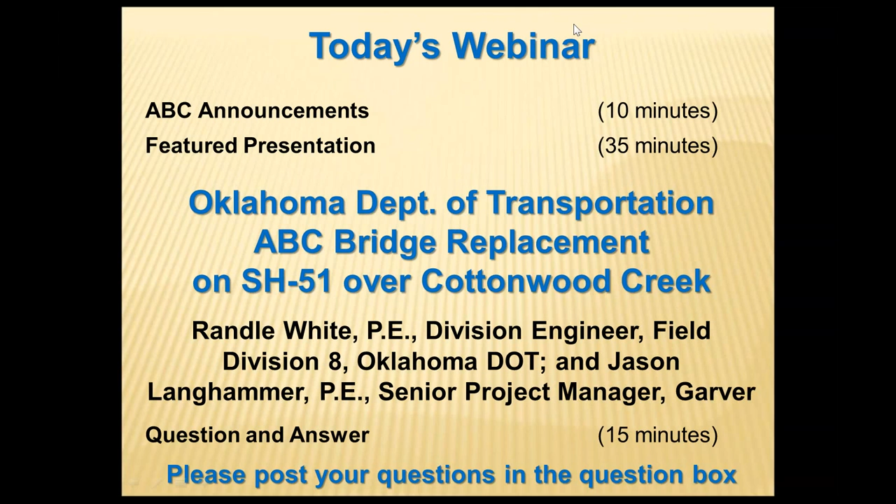Today's webinar features the Oklahoma DOT's lateral slide replacement of the State Highway 51 bridge over Cottonwood Creek. The presenters are Randle White, Division Engineer in Field Division 8 of the Oklahoma DOT, and Jason Langhammer, Senior Project Manager with Garver.

Good afternoon, I suppose, or good morning, depending on where you are. Jason and I are certainly happy to be here at the location to make the presentation. I'm going to have to ask somebody to get the slides. There we go, lost the slides for a minute, sorry about that. If you'll notice in the top right-hand corner of the slides, there should be a page number. If you have a question for Jason and I, if you'll refer to that, that'll help us get back and answer that question. Next.

This was the first accelerated bridge project in the state of Oklahoma. We had gone to several other states several years ago and looked at some of the accelerated bridge construction that they had been doing, but this was the first one in Oklahoma. One reason we wanted to do the bridge slide is back in 2011, our governor, Governor Fallin, challenged the Department of Transportation because we had a serious issue with structurally deficient bridges. We were showing up at the bottom of the list for some of the worst bridges in the nation from a structurally deficient standpoint. In 2011, our NBI list showed 706 structurally deficient bridges. The governor wanted us to reduce that number to get as close to zero structural deficiencies as we could by the end of the decade. To do that, we were going to have to address 80 to 100 bridges per year. So we were looking at opportunities to deliver projects and expedite construction, but we also knew with that number of bridges, we were going to have an impact on commuters, so we were looking to minimize that impact as well.

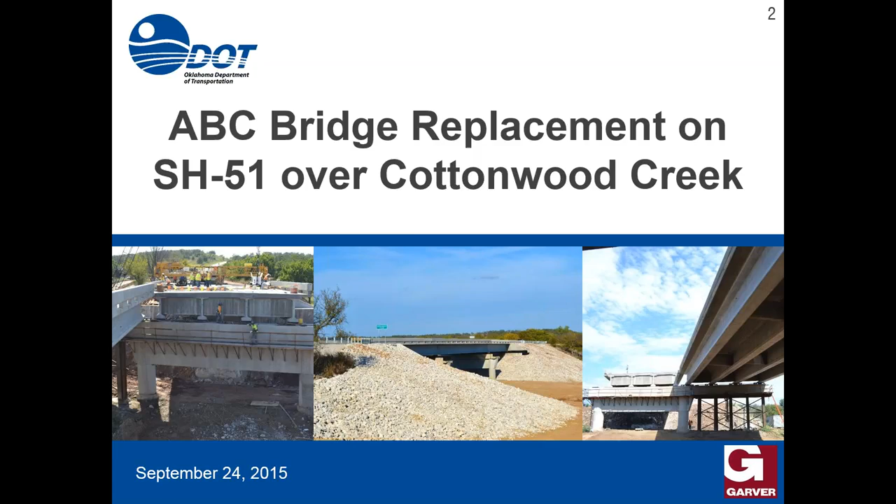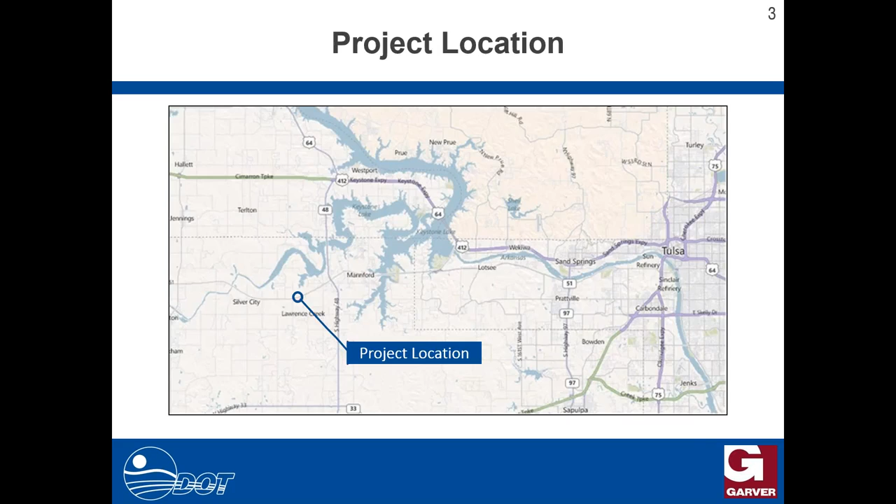The existing bridge was built in 1961 as part of the relocation of State Highway 51 when the Corps of Engineers built Lake Keystone. The bridge is 271 feet long, comprised of six 45-foot steel I-beam spans, with a clear roadway of 28 feet. The condition of the bridge is rated as structurally deficient. The deck is rated poor, the superstructure fair, and the substructure also poor.

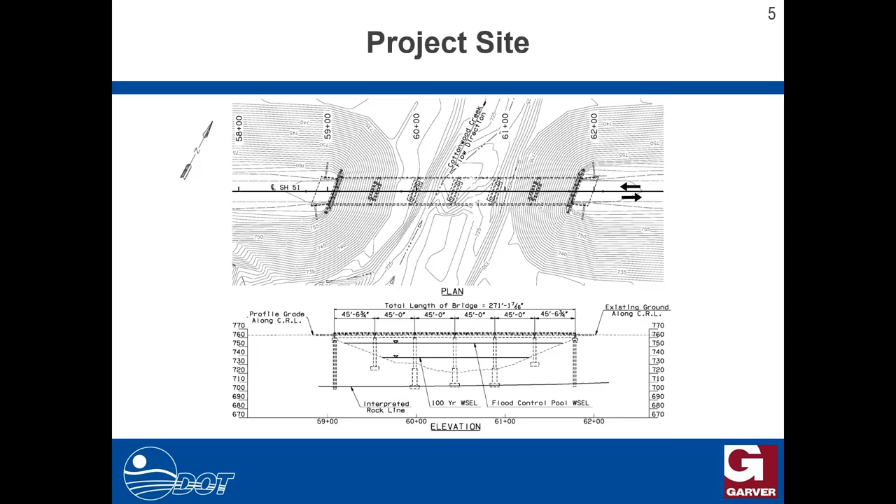Let's take a look at a couple of pre-construction photos next. This is on the roadway, looking to the west. The approach roadway width has two 12-foot lanes with two 8-foot shoulders. The bridge width is two 12-foot lanes with two 2-foot shoulders. You can see we have substandard guardrail and substandard bridge rails, as well as an asphalt overlay over the concrete approach slab. We'd had some settlement there, and that was an attempt to level out the bump at the end of the bridge.

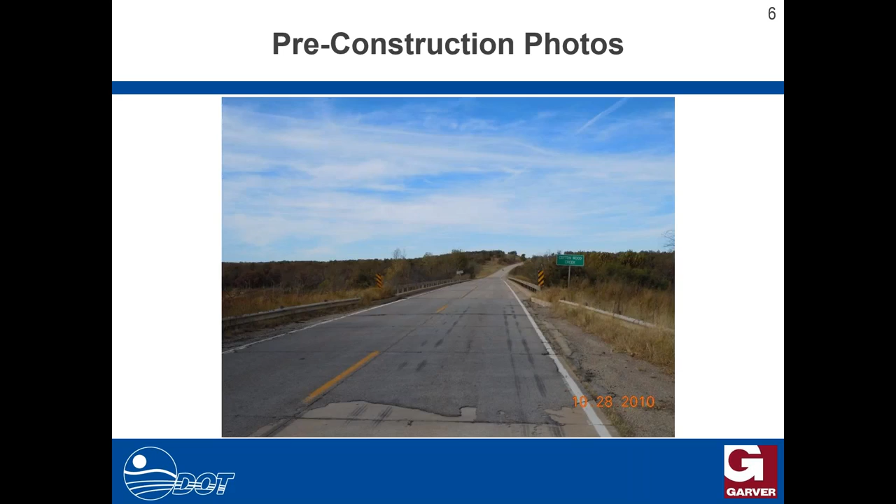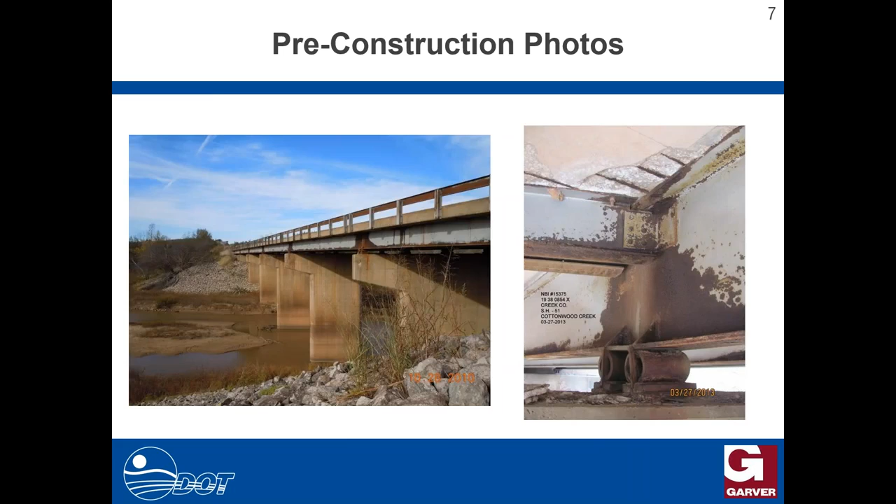Here we're taking a look at the pier caps. You can see that we're losing some of the pier caps, some of that is spalling off. The photo on the right shows some rust spots just under the roller bearings - those are some of the stirrups that are starting to rust.

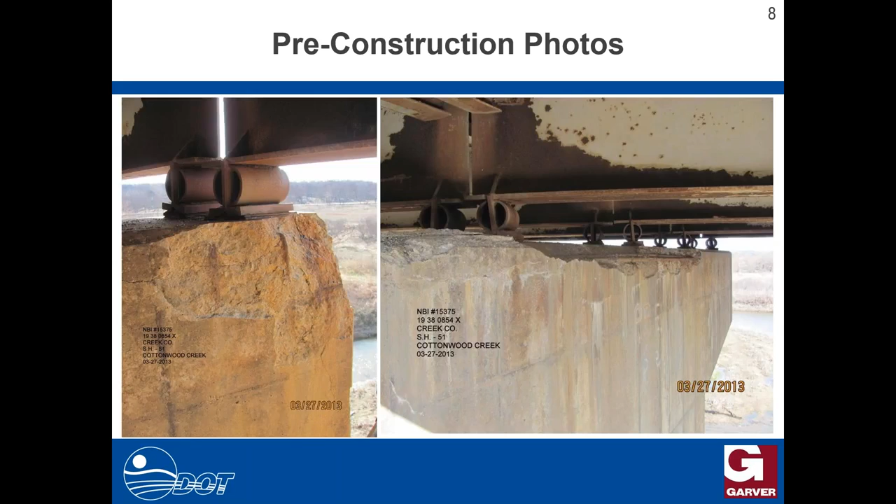The photo on the left shows additional spalling and rusting of the pier steel as well. The photo on the right is looking back to the south - that's the Lake Keystone wildlife area. This is an area that the lake, whenever it fills up, backs up and floods.

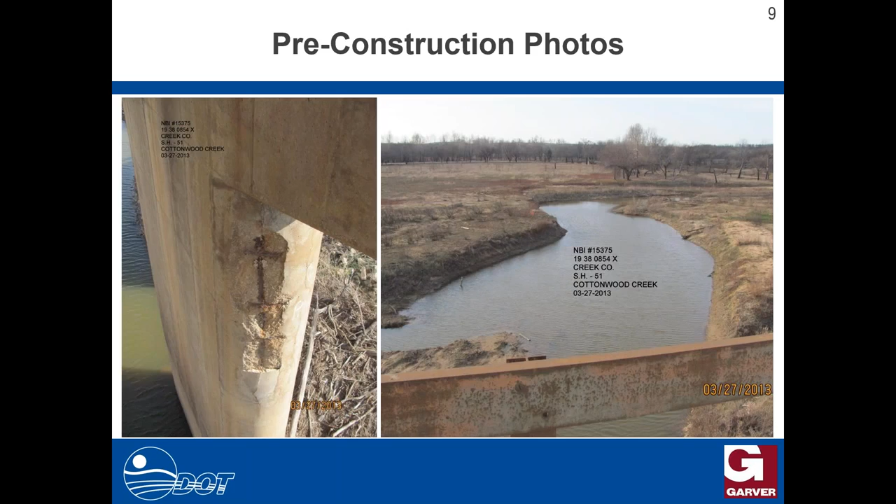State Highway 51 is a commuter route between the city of Tulsa and Oklahoma State University. There's a lot of local recreational traffic there as well, school buses, emergency vehicles. This detour is 35 miles long, and back at the time we were looking at this, gas prices were a little over $3 a gallon here in Oklahoma. They're down to about $2 a gallon right now, so a little bit of difference there.

For the project development process, because this was a unique site, we looked at multiple replacement alternatives, including conventional, staged, and accelerated. For that accelerated alternative, we looked at the different methods applicable to the site, some of the risks and benefits of each of those methods, as well as putting those details in the plans, evaluated the site constraints, and then moved on to type, size, and layout. Once the department approved the preferred alternative, we moved forward to final design and construction.

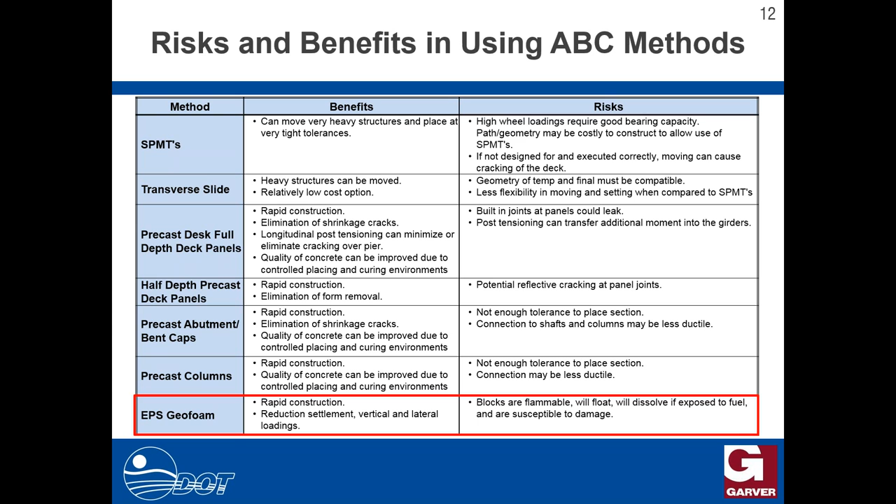So you have to be careful of the site you're using it at, as it may have potential impacts due to fuel or petroleum products. I look at a table like this as the methods being the tools you have in your toolbox, and you have to use the right tool for the specific job and site you're looking at. There's also risks and benefits to providing ABC details in the plans.

For structural placement methods specifically, we categorize those into two types. Type 1 is where the contractor is to propose a placement method. The contractor comes up with the methodology and accepts all of the risks and durations required of the project. The benefit is that you eliminate risk associated with design errors on the consulting side, but incomplete or loose specifications could result in change orders, as with any project.

But one of the main things is that inadequate engineering support may lead to problems in the field.

Type 2 is where a concept is defined and provided in the plans. It has the benefit of allowing the contractor to have a biddable set of plans and potentially reduce costs. It provides an initial concept that contractors who may be unfamiliar with the technology can look at and use as a baseline, proposing concepts that play to their strengths.

The biggest benefit we see is that it allows the DOT to have more control over the methods used. And like any project, inadequate design details may lead to change orders, and loose or incomplete specifications could result in concepts that the client or the DOT does not want.

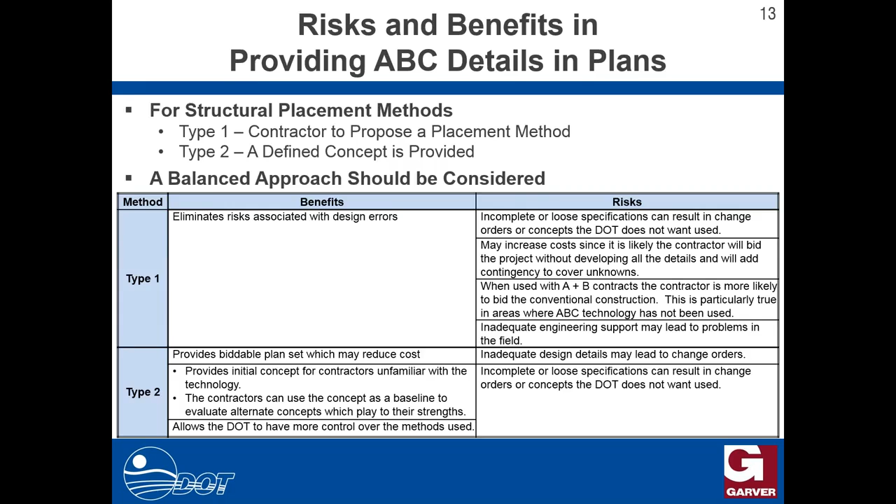Specifically for the Cottonwood Creek project on structural placement methods, we looked at 3 different methodologies: off-site construction, where you construct your spans off-site, move those spans into the area with an SPMT, and then longitudinally launch those spans over the creek. It does have its advantages. One of the major disadvantages is cost, because combining 2 complex methodologies together is very expensive.

We also looked at off-site construction of the spans, moving those in with trucks and craning them in. Because of our site topography and the requirements, that was not really a practical application.

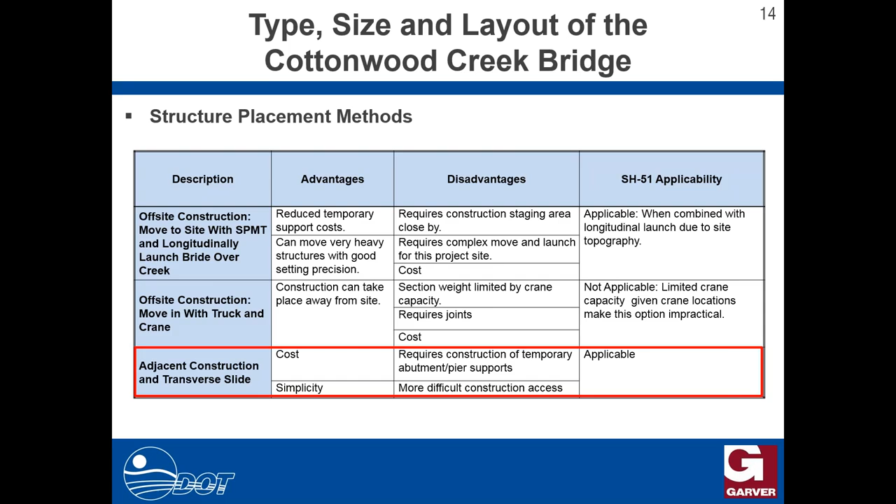Adjacent construction and a transverse slide really have the advantage of cost and simplicity. Along with that structural placement method, we wanted to look at accelerated substructure methods as well to expedite the entire project duration.

We looked at constructing the substructures underneath the existing bridge, which has the advantage of conventional style construction, but it does have the potential issue of limited overhead clearance when constructing those foundations underneath an existing bridge.

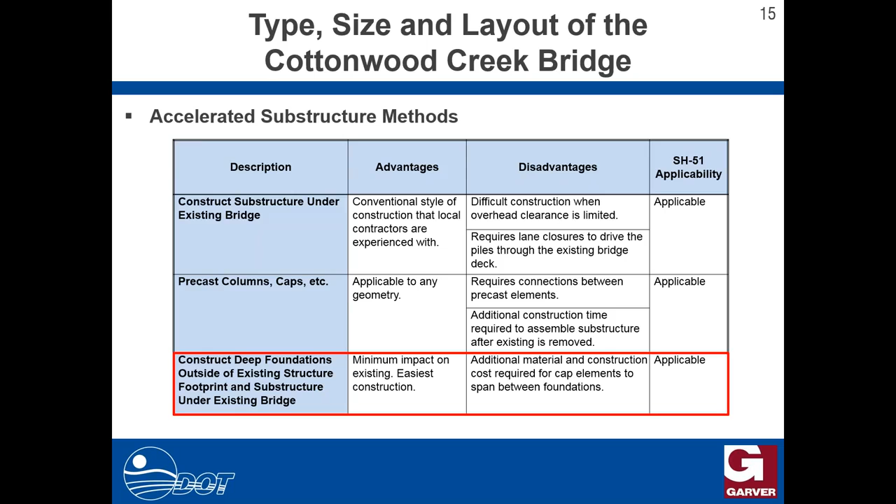We also looked at precast columns and caps, which was applicable as well. But we settled on constructing deep foundations outside the existing structure footprint, and the pier caps underneath the existing bridge, primarily because it minimizes the impact on existing users. It is conventional construction that contractors in the area are familiar with, and it provides the easiest construction.

In summary, the transverse slide methodology was chosen primarily because the site is not really conducive to self-propelled modular transporters. We have poor soils in the area, and as Randle mentioned, this is backwater for Keystone Lake, with potential flooding. The SPMT plus a longitudinal launch combined is very expensive.

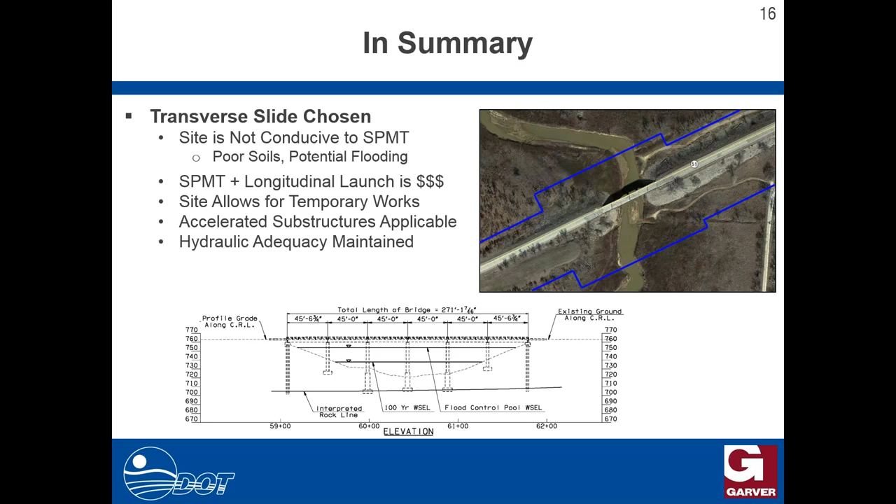The site does allow for temporary works because we have relatively shallow bedrock here for foundations. The accelerated substructures were applicable as well because we have a relatively narrow bridge, and we could do all of this while maintaining hydraulic adequacy and freeboard.

Some of the design considerations for substructure placement and for the permanent substructure design include how we're going to account for fixity, expansion, and contraction of the bridge in its final condition, even though we have to move the span separately or together. As far as the slide itself, do we want to push it or pull it?

Of course, we're dealing with some very heavy loads here that need to be accounted for in our loading combinations. Sliding systems are also a very important factor in considering the methodology, as well as the sequence of construction, to make sure this project is constructible and that the goal to accelerate the project is achieved.

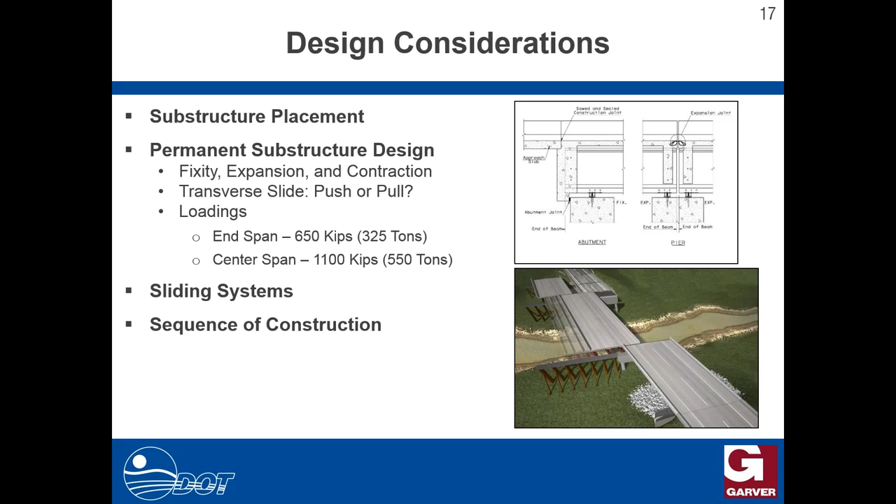So for substructure placement, most of you are engineers, you know that placement of your spans, the span length, and the structural depth are all interrelated. We try to balance those 3 items in order to avoid conflicts with the existing or proposed structures, maintain hydraulic adequacy, and as always provide constructability.

Here is an elevation view of the pier, and you can see the blue lines illustrating the reinforcing steel. As I mentioned, the 45-foot span is quite larger than normal, and because of the T-beam design and the relatively large loads sliding from the temporary substructures to the permanent, we had to have some pretty tight spacing on our stirrups for the torsion and shear.

That's one thing to keep in mind when you have heavily reinforced structures, and of course you can't pre-install the anchor bolts, so how are you going to account for the contractor to place those anchor bolts? Constructability was the main concern here.

For the abutment design, similarly, we constructed those underneath the existing bridge, and as you can see from the elevation view, we were able to do that with the use of a soil nail wall. You can see the red lines in the elevation view now. That's where we constructed those soil nail walls, and those walls really serve three different purposes.

It served, one, to keep the existing structure stable; two, to provide an area of excavation for the new abutment; and thirdly, it helped to reduce the amount of lateral pressures that the proposed abutment would see.

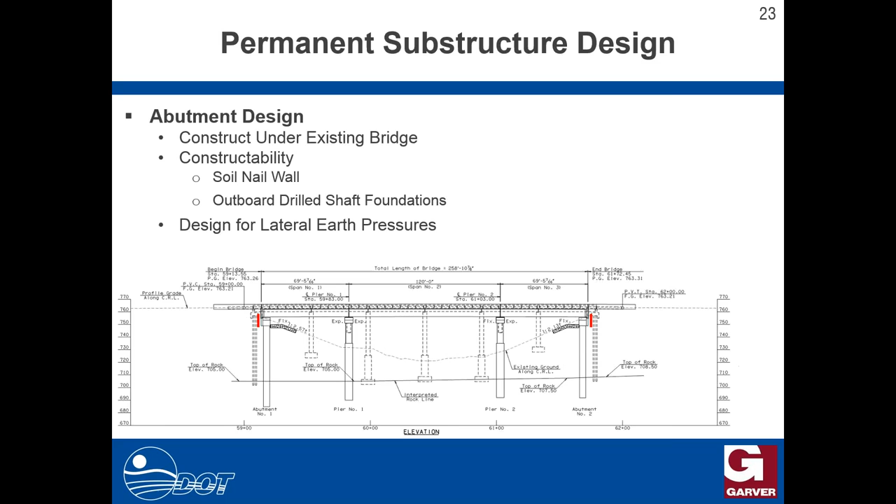Constructability is always a major concern, so here's a picture showing where that excavation would be. We only had about 11-foot headroom, so it's always important to make sure that there's equipment available to construct that wall within the tolerances or the site constraints that you have.

On the right-hand side, you can see the embankment. The dashed line, again, is the existing structure, and I'm highlighting a blue line there, and that's where the proposed soil nail wall was constructed in front of the red proposed abutment. As I mentioned before, design for lateral earth pressures was a major concern because of the configuration of the abutment, and so that soil nail wall helped reduce that.

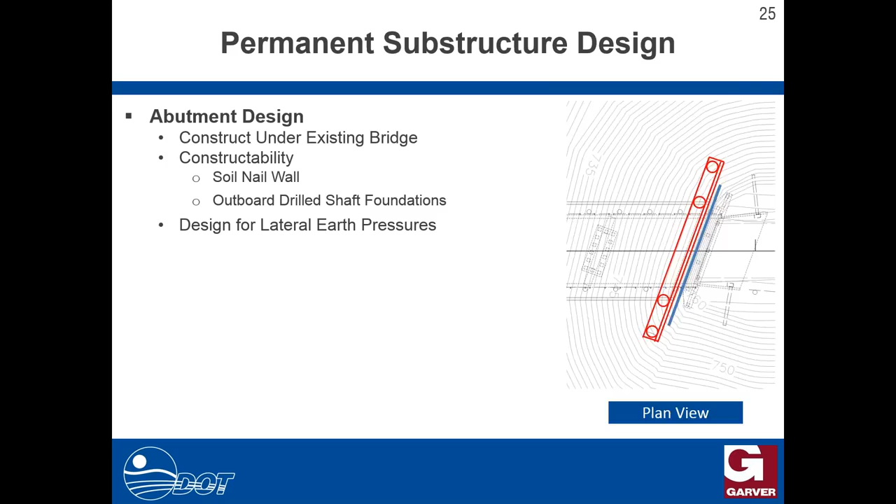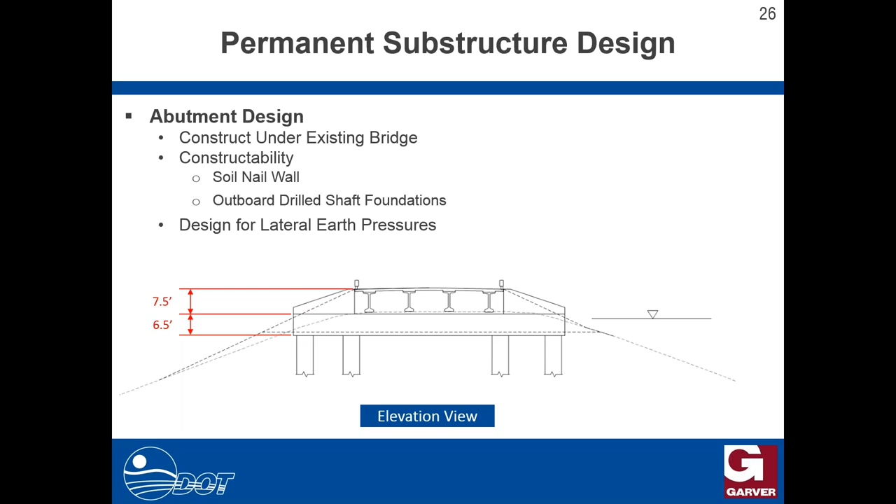Here's an elevation view of the abutment itself. You can see where the high water mark would have been. Because of that span underneath the existing bridge with outboard drilled shafts, we had a relatively tall cap and a relatively tall superstructure in order to lower our proposed low beam, so there was quite a bit of lateral earth pressure that needed to be accounted for.

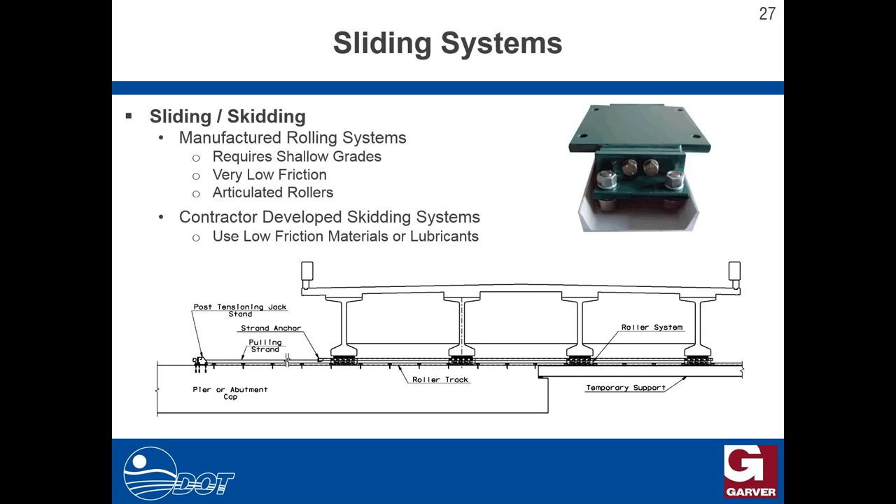Each one of these rollers is articulated. Here is the underside of one of those rollers. It's kind of like a rolling caterpillar track that you're used to seeing on heavy equipment, but each one of these cylinders also has a bearing, and that's really what provides the low friction.

There are contractor-developed skidding systems out there that use low-friction materials or lubricants. In the case of Cottonwood Creek, we had specified a roller-type system but allowed the contractor to propose new methods. We believe that proposing or specifying a system at a minimum and allowing approved equals really set the bar, and it gave the DOT justification if a system they didn't like was proposed, since we had one specified in the plans and specs.

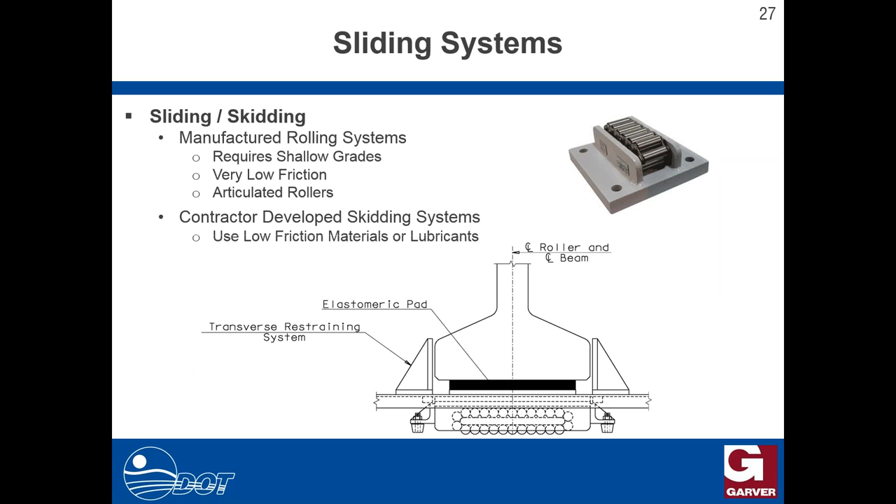Here's an elevation view of how that articulated roller system would look underneath a beam.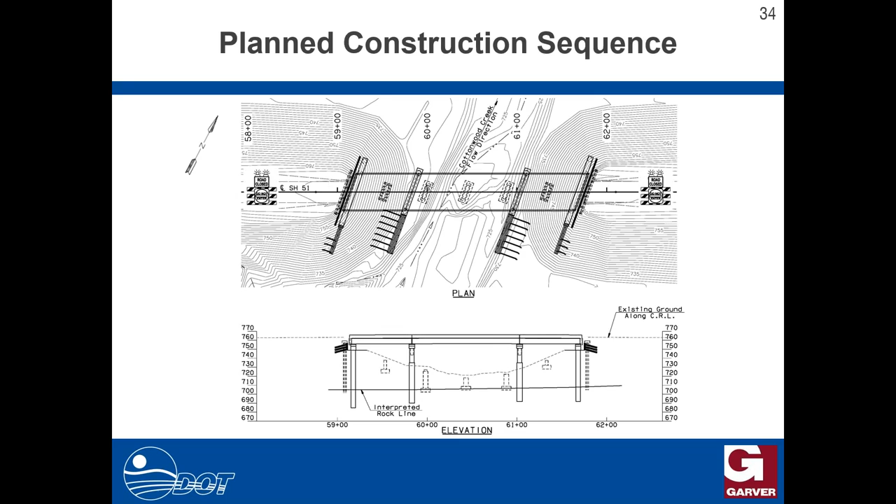From there, the beams can be set, the deck can be poured, and at that point, you're really ready to move the superstructure itself. So you could close the road, demo the existing bridge, slide the spans into place, remove the existing substructures, and then perform your final grading, and then open it up to traffic.

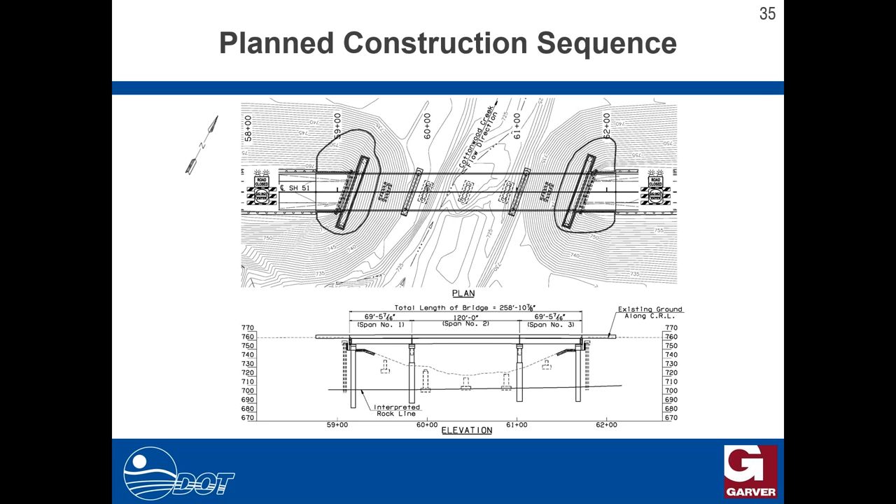Got a short video here that kind of illustrates that scenario in a little bit more detail.

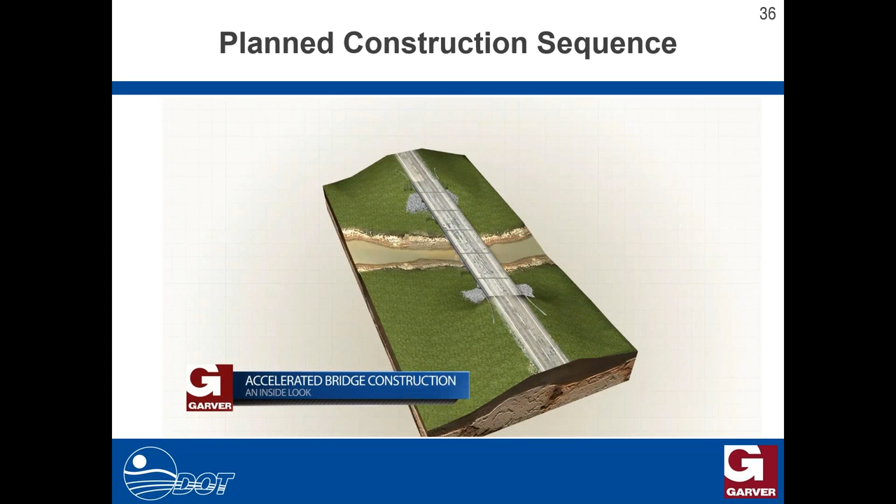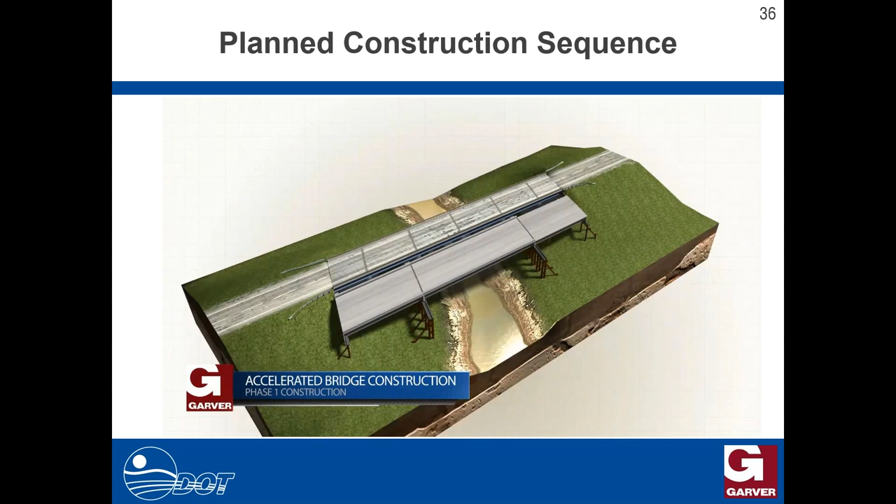There's the temporary substructures going in, beams and decks being placed. Closure of the road, removal of the existing bridge and substructures, sliding the spans one at a time, and then removing the temporary substructures, opening it up to traffic.

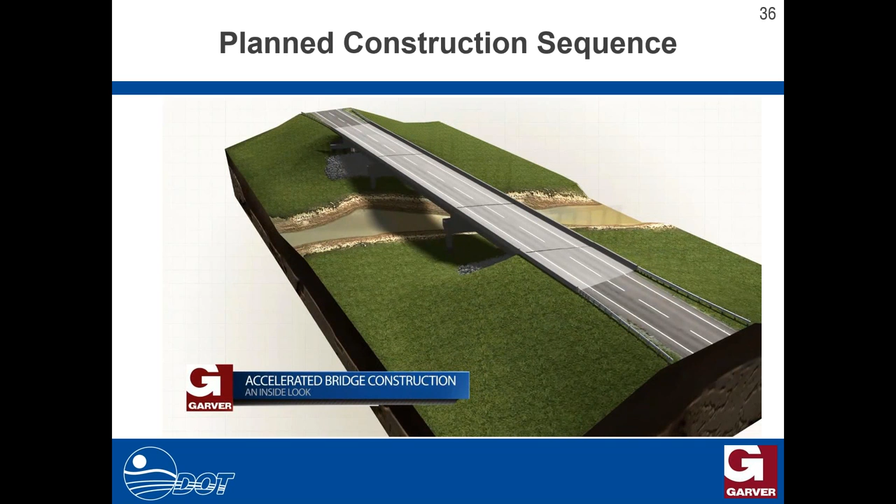Some design and construction suggestions from a designer's perspective in regards to plan preparation and the design of ABC. You always want to use the site characteristics to your advantage. In the case of Cottonwood Creek, we had more than adequate freeboard underneath the existing bridge, which allowed us to use longer spans, deeper structural depth, and to construct those substructures underneath the existing bridge. So it worked out in our favor on this project.

Always want to balance innovation with owner preferences in mind. As an example, bearings—if the department wants to use or is accustomed to using a specific type of bearing, we try to accommodate that, and in the end it's going to reduce costs overall because contractors are used to those specific materials and methods.

Always want to provide a concept to set the bar, so what the contractor bids on is clearly stated. In regards to what they bid on, we want to be very clear and concise about payment. There's specialty operations and equipment that's required, and specifications and plan notes are extremely important so the department does not receive change orders and additional costs that were not anticipated.

As far as the specifications and submittals, design requirements for temporary structures or even permanent structures if that's the case on that particular project—in Cottonwood Creek, for instance, the temporary substructure requirements were given to the contractor because we thought they might want to use some materials they had on hand, which could reduce overall costs of the project. But it's very important, if those responsibilities are left to the contractor, that the requirements for the design of those substructures are very clearly stated.

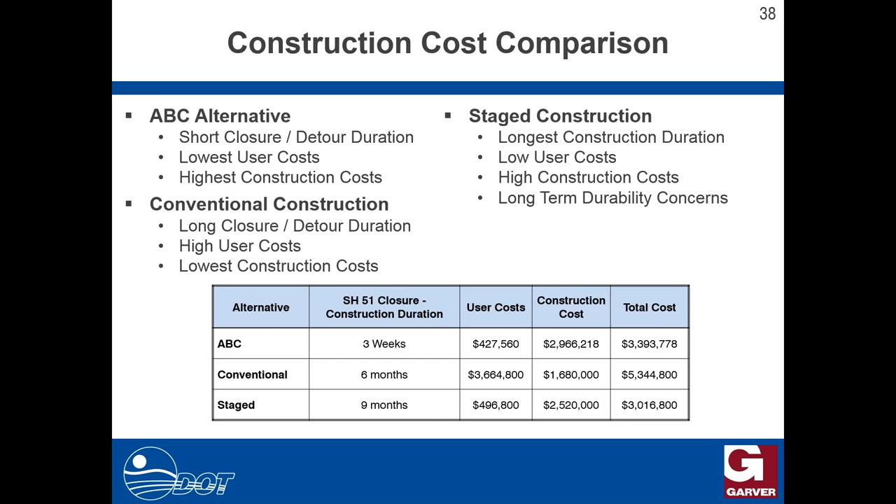One thing to make sure of is that your temporary structure is sitting on a solid foundation, suitable for the superstructure you're building. You also want to make sure there's no differential settlement or deflection. There are a lot of issues to contend with when moving a large structure like this and building it in the field.

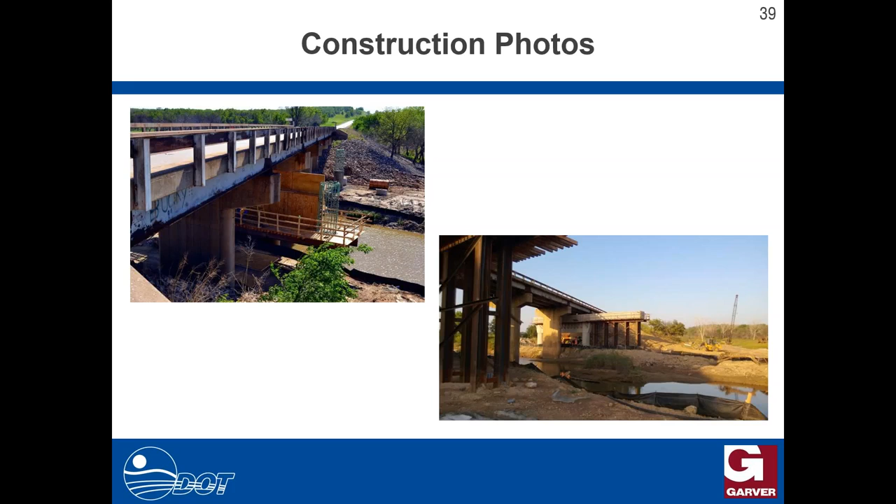As Jason mentioned, as a designer you need to do your homework up front to make sure what you're designing is constructible and compatible with the equipment—make sure there's equipment capable of accomplishing that.

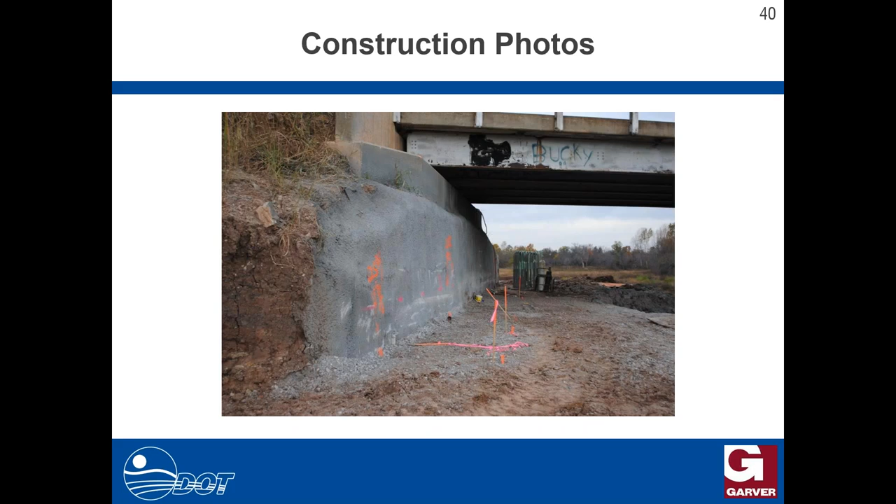Here you can see the substructure for the new bridge built underneath the existing bridge. Also, right next to it, you can see the piling for the temporary structure, with a connection in between.

It's critical that as you slide the bridge from one side to the other, you have really tight tolerances, and the top of the cap must be smooth and level so that bearing stresses are equally distributed as you transfer across.

The other thing to look at is the steel beams versus the bulb tees—you can see the difference in structural depth. This is what allowed us to maintain basically the existing profile grade without raising it up, and allowed us to underbuild and slide the bridge into place.

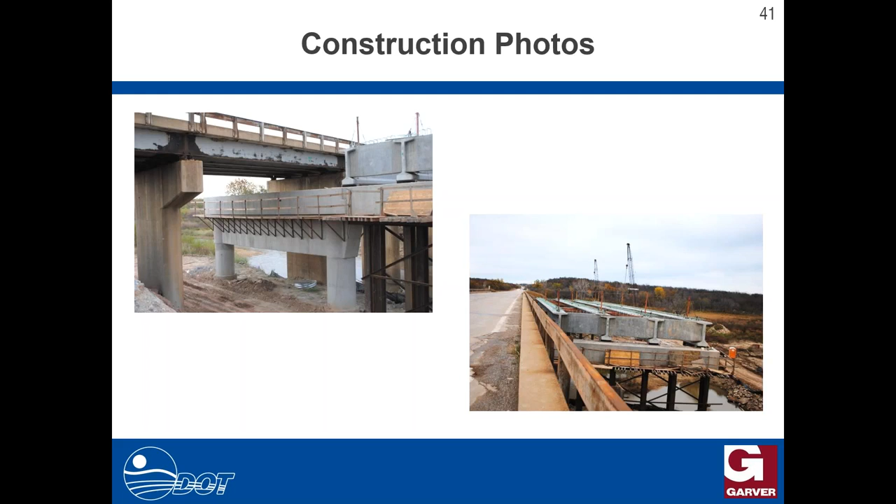The photo on the left shows the new superstructure built in place right next to the 1961 structure, giving you an idea of how close together they were built.

The photo on the right shows the bottom section starting to move, or being slid into place. You can see the piers out in the middle where contractors continue working on removing the piers as they slide one of the sections out.

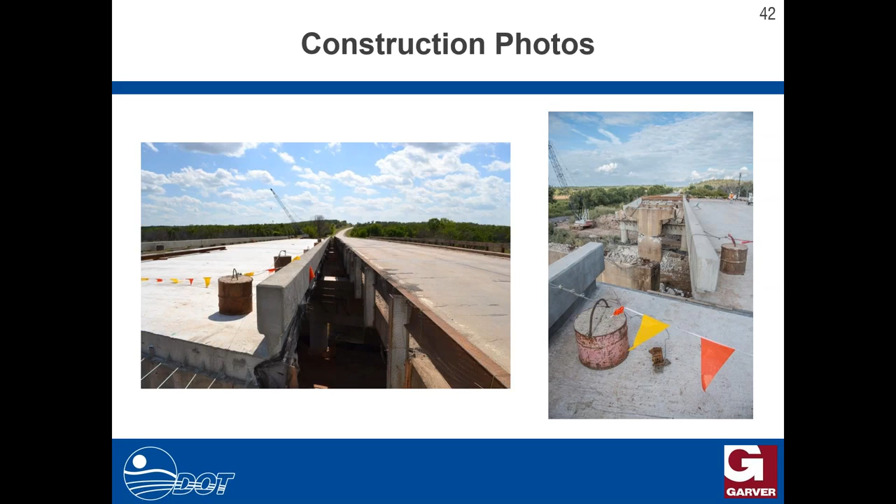This slide shows continuation of the contractor working to remove the piers in preparation for sliding. The photograph on the right shows the temporary structure supporting the new superstructure, as well as the new substructure waiting for the span.

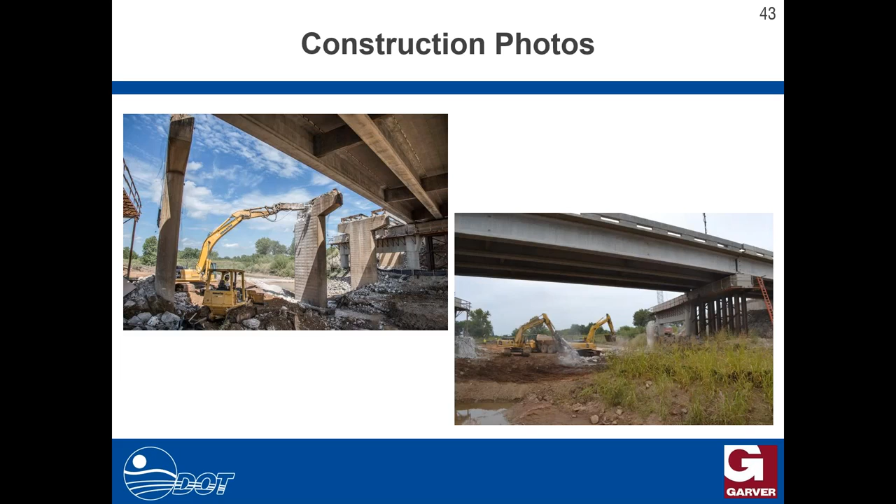Once they got everything into place, they would slide the beam over to the new structure, put the jacks under, raise it again, take the track and slide materials out from underneath, and install the bearing assemblies and anchor bolts, then set the bridge back down on top of the bearing assemblies. Again, it's very critical that the tolerances are really tight and that your pier cap is level.

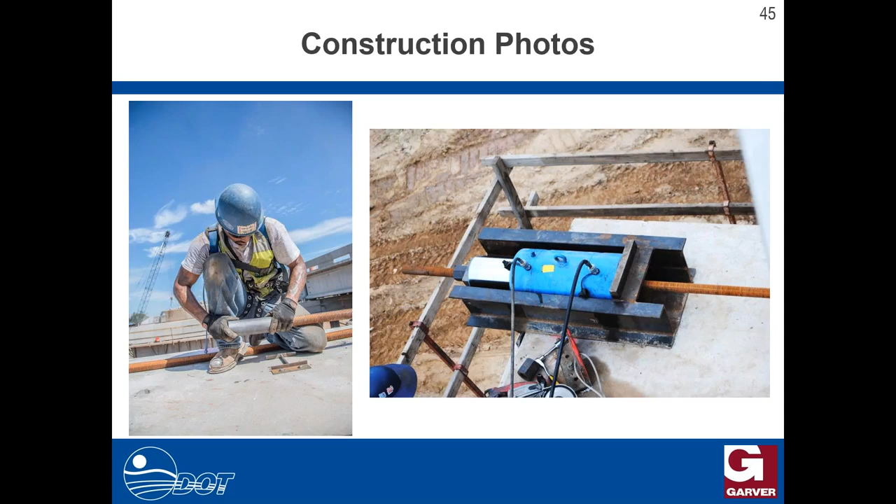This photograph, if you look at the top of the deck there, that little gray metal thing you see is your expansion joint. Those were constructed with the new superstructure in place on the temporary supports, and once they moved into the permanent location, they came back in and put the neoprene membrane in to complete the expansion joint. These joints accommodate thermal expansion.

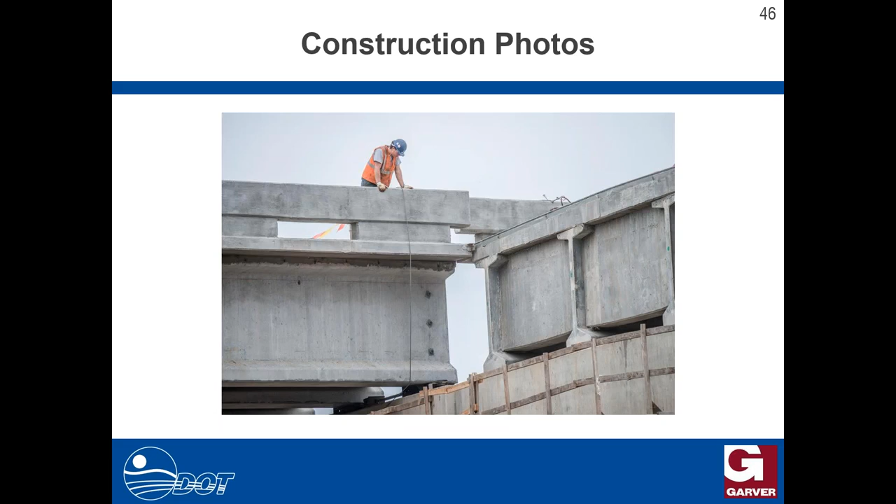This is a photograph looking at the end of one of the slides of the spans. You can barely make out on the ends the two jacking locations that they're using.

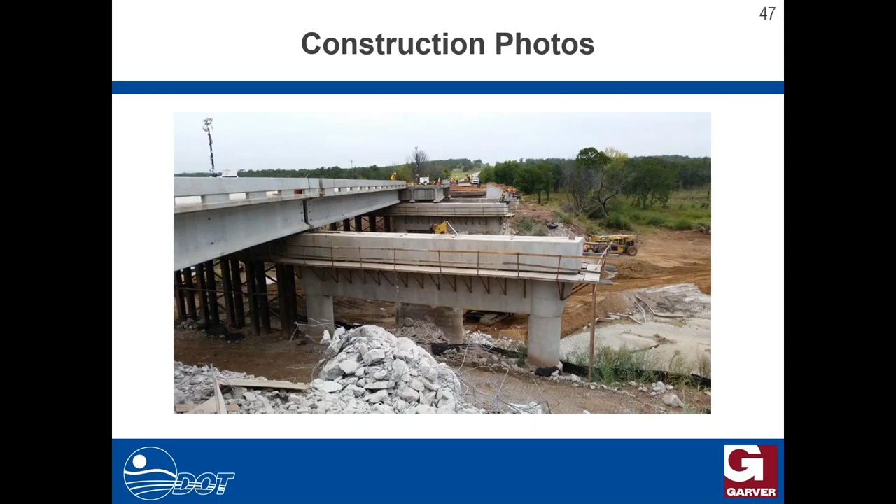One of the other things, if you look at this pier cap closest to you, you'll notice there aren't any anchor bolts sticking up. The contractor used inserts. If you remember the rebar layout that Jason showed, they were on 6-inch centers, so it was really tight there—you couldn't really put your anchor bolts in and still accomplish the slide. So it was critical that they located the anchor bolts, the inserts for the anchor bolts, prior to the slide, because once you made the slide, you really didn't want to be drilling and cutting a lot of that rebar to try to set your anchor bolts.

Contractors successfully completed 2 slides. They're getting ready to slide the middle span, the last slide there.

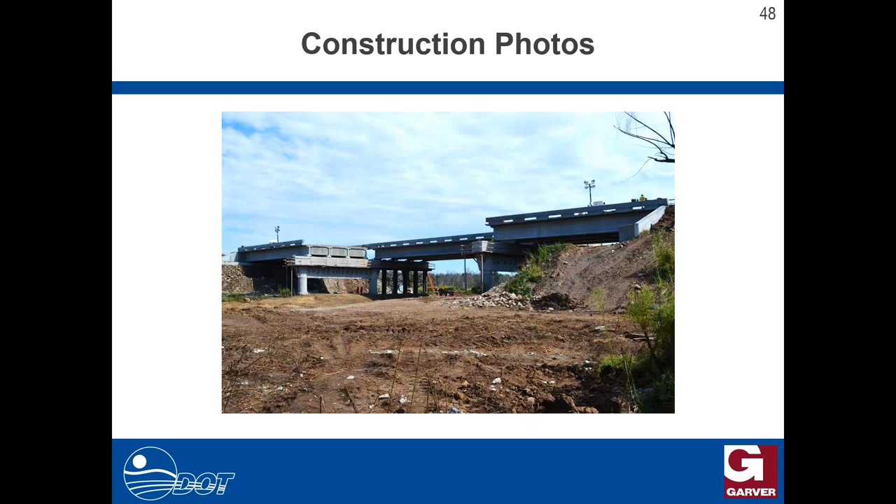This is showing the bottom side of the anchor assemblies, the anchor bolts in place, the new structure sitting on the new substructure.

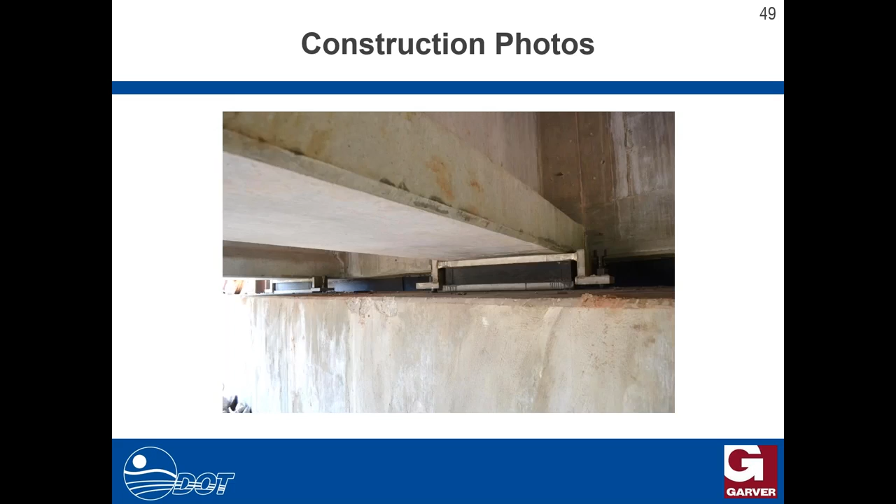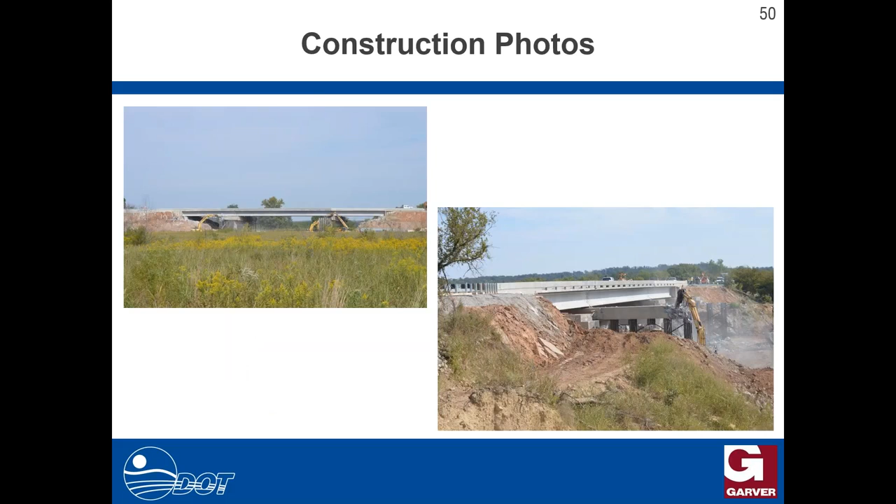These are a couple of views showing the contractor removing the temporary structures. The new bridge is in place, and they're getting ready to open it up. The contractor has cleaned up the area and is ready to turn traffic onto the new structure.

The contractor for this project is Manhattan Road and Bridge. The contract award was $3.4 million. We had an incentive disincentive on the project for a road closure—we allowed 21 days maximum, and the incentive disincentive was $20,000 per calendar day.

And let's go to the video.

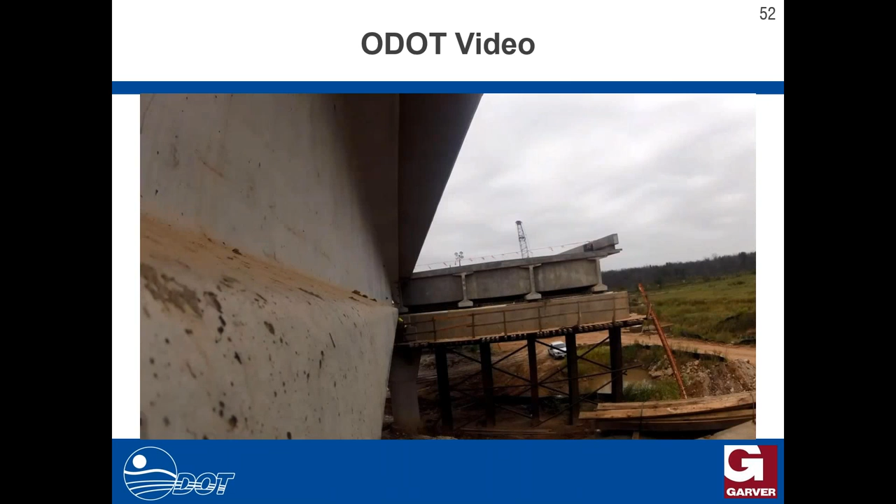Now I'd like to talk a little about lessons learned. Basically, anything new is unknown, so you've got to get buy-in from top levels, your boss, industry partners, the public. Two of the big takeaways from this lateral slide: we were able to minimize traffic disruption from a number of months to just a number of days, which we felt pretty positive about. Also, the work zone safety was greatly improved for workers and the traveling public, because the lateral slide allowed the bridge to be built adjacent to the existing bridge instead of under traffic.

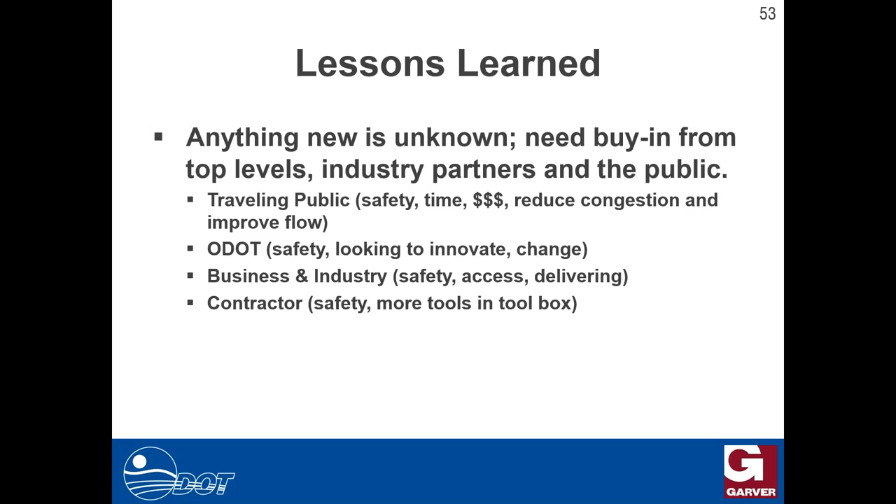Another lesson learned: since we were building off-site, we needed to make sure we had adequate roadway tie-in lengths. Obviously you don't want to build a nice brand new bridge and have a bump at the end of it. You want a smooth ride, and we got a very smooth ride on that. We were really pleased with that.

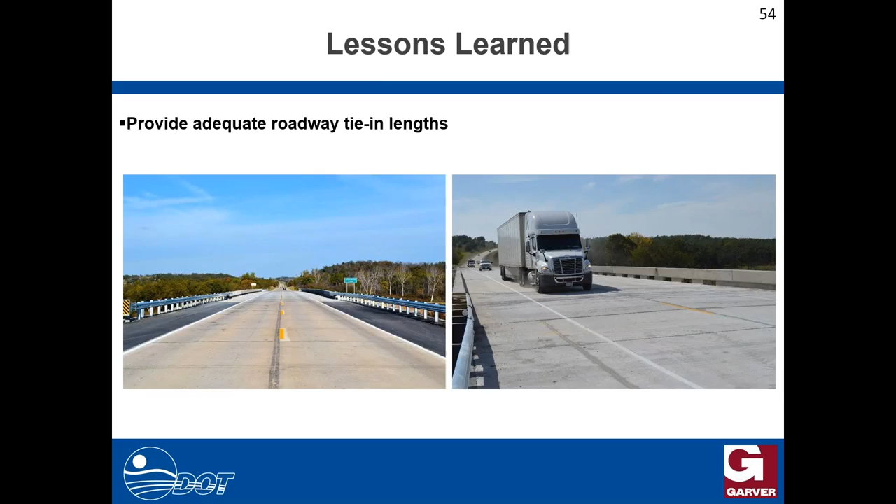You heard us talking about tolerances and measuring things. If you look here, in the middle that little plastic looking deal that's rolled up - there was a little bump that got the sliding sled off center with the track, and it started peeling up the track. The contractor had to stop and cut that out and get things back on track. Basically, things are going to happen, and you're going to have to be ready to adapt and adjust and get on down the road.

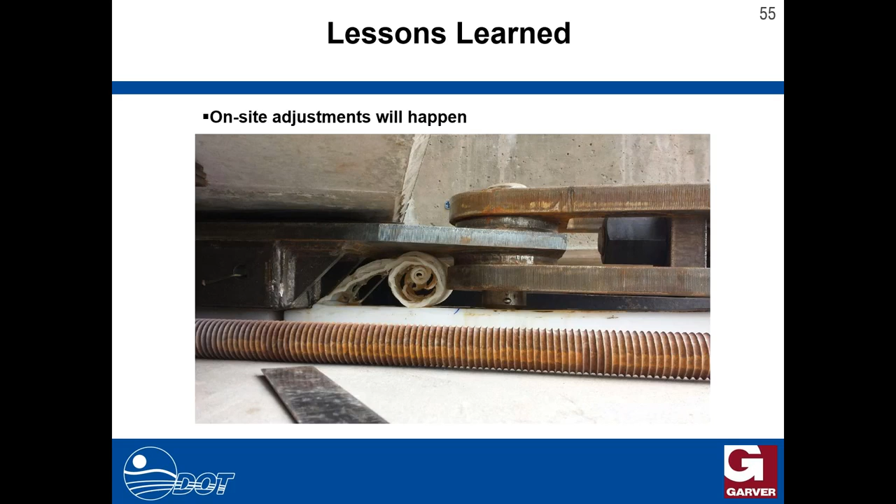I don't know if y'all have cliff swallows in the rest of the nation, but we certainly have them here in Oklahoma. If they come out and nest on your project, they'll shut you down from April through September. What was unusual was we had a steel structure, and we didn't notice any nesting on it, but as soon as we built the new concrete structure and had the formwork there, the birds really seemed to love that, and they built a lot of nests there. This project was shut down from May 2014 through September 2014 for the nesting birds.

The thing we feel very fortunate about is that this structure was built parallel to the existing road, so we were able to leave the existing road open. We hadn't already taken out the old structure, so it did not inconvenience the public. Had we not had the structure built on the side, this closure probably would have added another 5 months to the construction time. But what we learned is, if you build it, they will come, or they will nest.

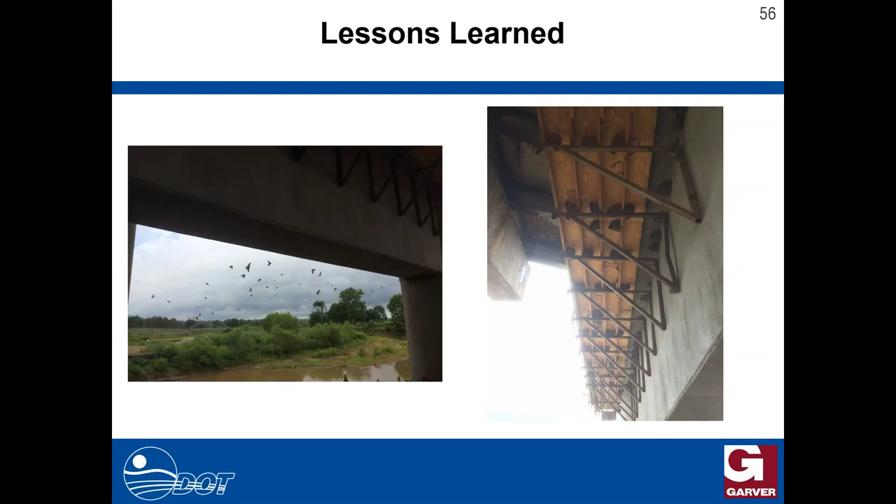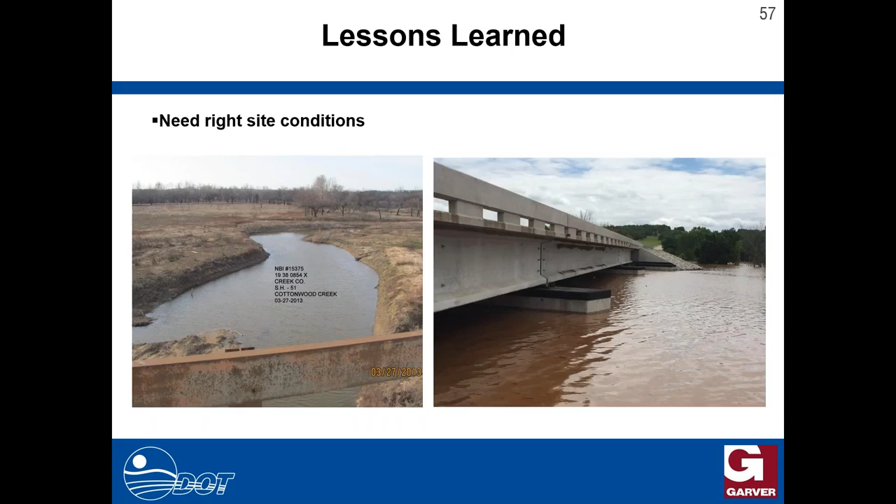Another lesson learned: conventional structures are built to really tight tolerances. When you're moving a structure, the tolerances are going to be even tighter than in a conventional structure. When dealing with an ABC project, a good suggestion is to live by the woodworker's golden rule: measure twice, cut once. Can't emphasize enough - check, double check, raise the red flag if you see something that doesn't fit.

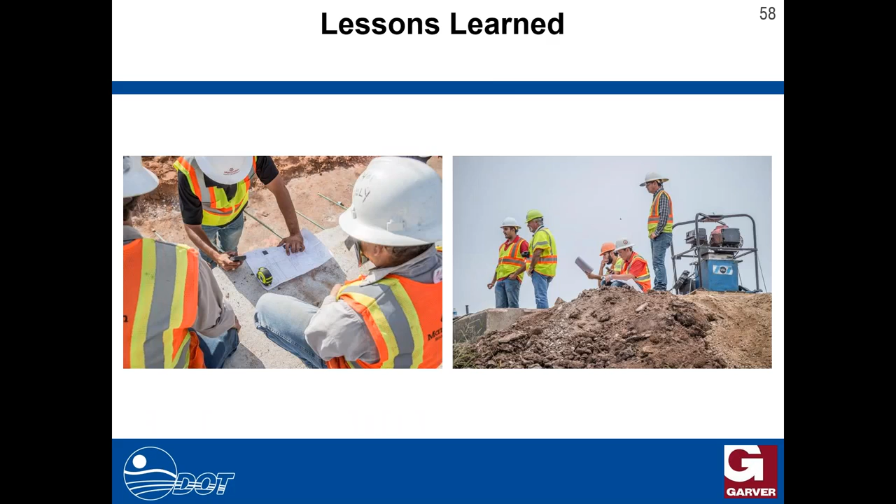This is our executive director for the Department of Transportation here in Oklahoma, Mike Patterson. Whenever you do something for the first time, you need to expect increased attention, not only from the traveling public and industry partners, but also your boss - they'll come out and spend a day with you. And the last lesson I learned was to take steps to document all stages with videos and photos, because you never know when you're going to have to be given one of these presentations.

And I think that's it for us. So if y'all have got any questions.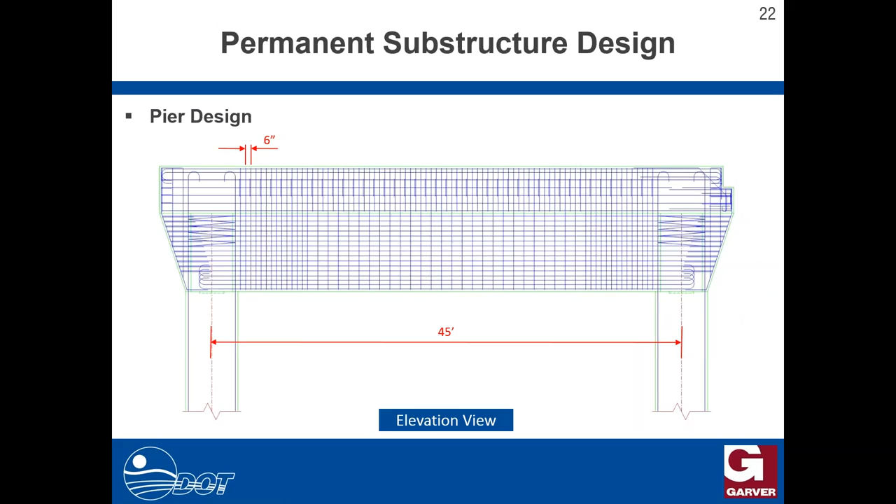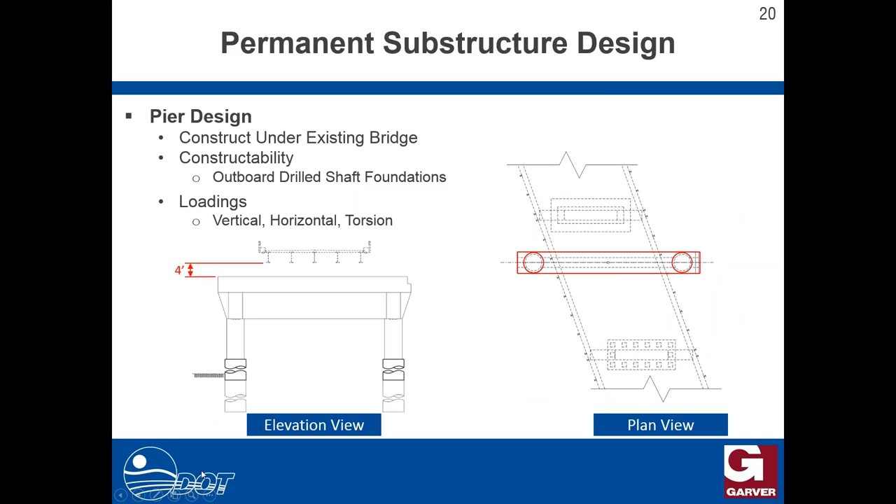Well, the concrete was consolidated using traditional methods. We made sure that we didn't have reinforcing steel closer than 6 inches, met the requirements that you would for traditional concrete, although it did have more reinforcing steel than what you would typically have, but the contractor primarily used traditional methods.

Any special mixes like a self-consolidating or pseudo self-consolidating concrete mix, or was it just conventional concrete with low slump and conventional vibration? It was conventional vibration, and Oklahoma DOT specs does require a range of acceptable slump. In this case, I'm not aware that they tried to propose something outside of the normal specification.

Okay, good, we can check with the residency and see if they used any special mixes. We don't know that we have that answer right now.

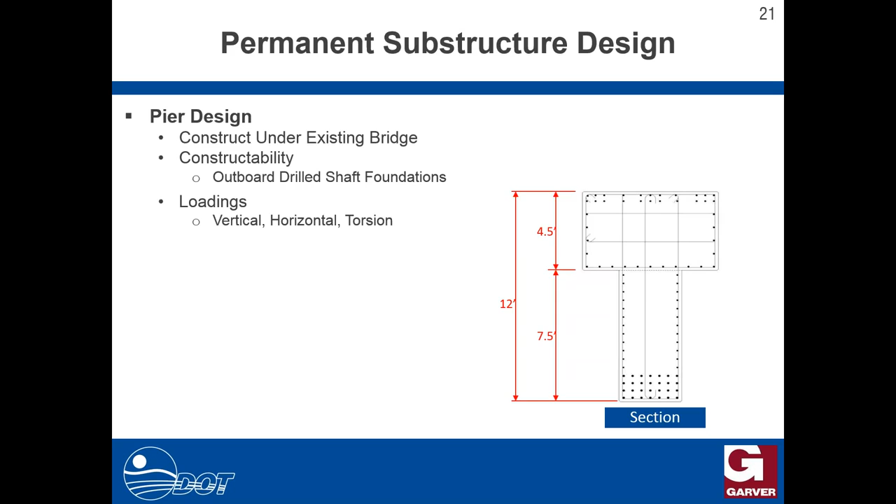And your contractor after the job, any feedback from him or her? I think the project went really well as far as they were able to get in and do the work. They earned an incentive on the project. So I think all in all, from the standpoint that the department, the consultant Garver, and then Manhattan Road and Bridge, it was one of those things that everybody worked closely together to make sure this was a successful project. And the fact that the contractor was able to get the work done in 11 days and get it opened back up, it really was a good project, and things did go well. Everybody worked well together. Looks like a great job.